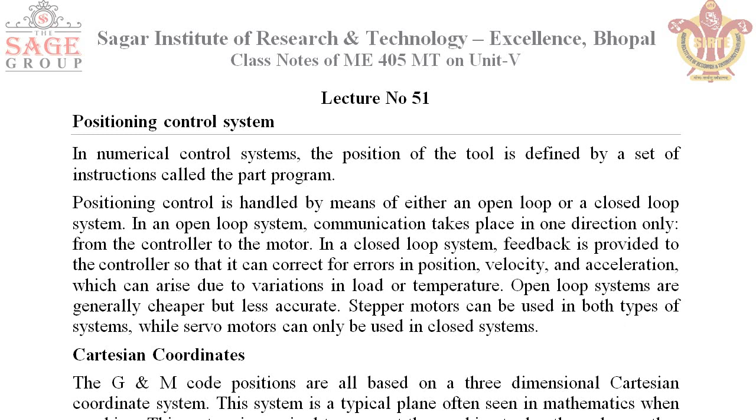Now the next thing is Cartesian coordinates.

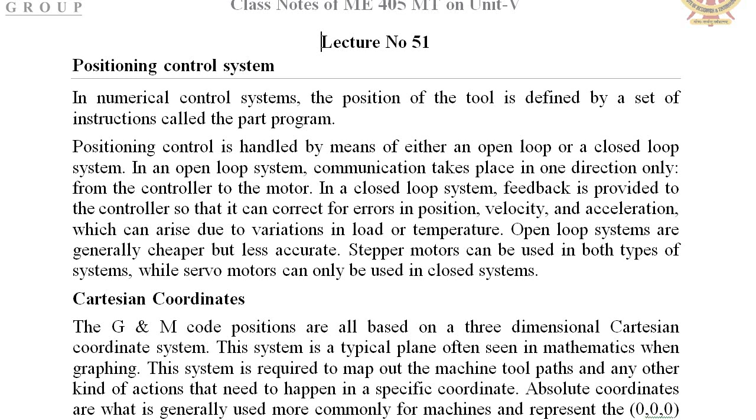The G and M codes positions are all based on the 3-dimension Cartesian coordinate system.

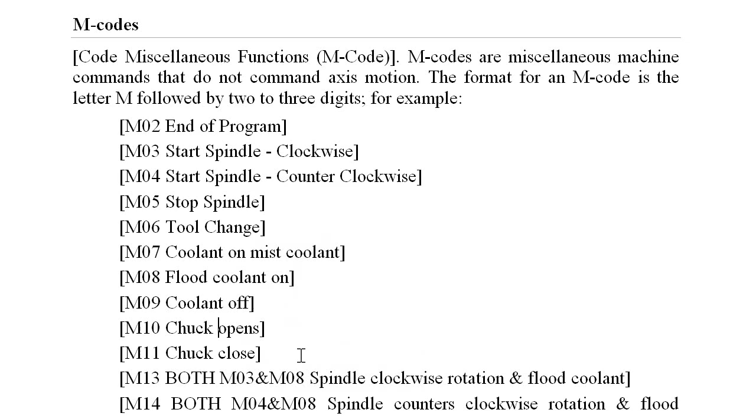M11 chuck close, M13 both M03 and M08, spindle clockwise rotation and flood coolant, M14 both M04 and M08, spindle counterclockwise rotation and flood coolant.

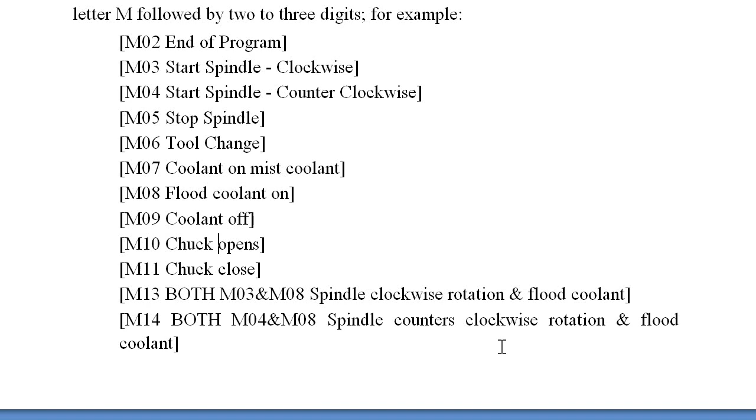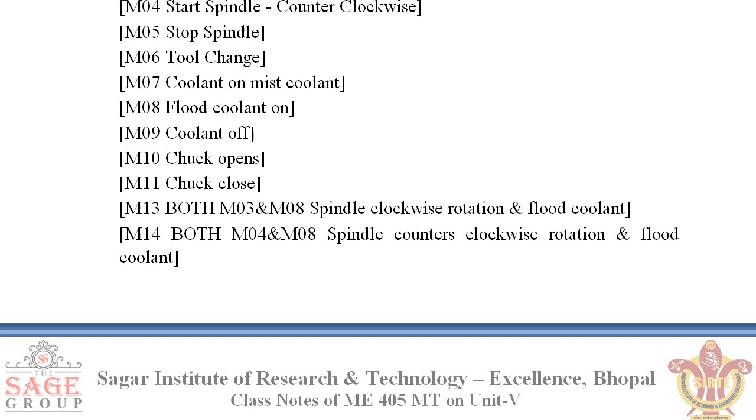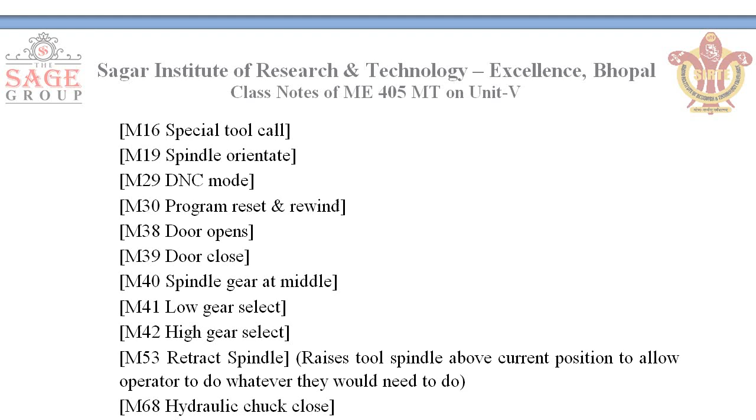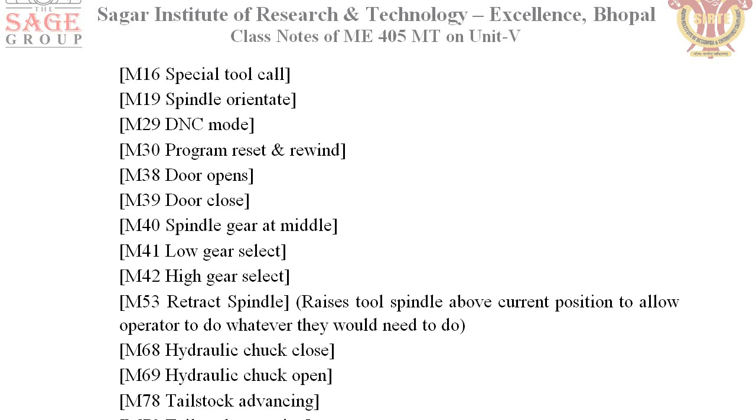Then this is M16. M16 special tool call, M19 spindle orientation, M29 DNC mode, M30 program reset and rewind, M38 door open, M39 door close, M40 spindle gear at middle, M41 low gear select, M42 high gear select, M53 retract spindle.

M68 hydraulic chuck close, M69 hydraulic chuck open, M78 tailstock advancing, M79 tailstock reversing. So these are the examples of M codes. So I hope you understand.

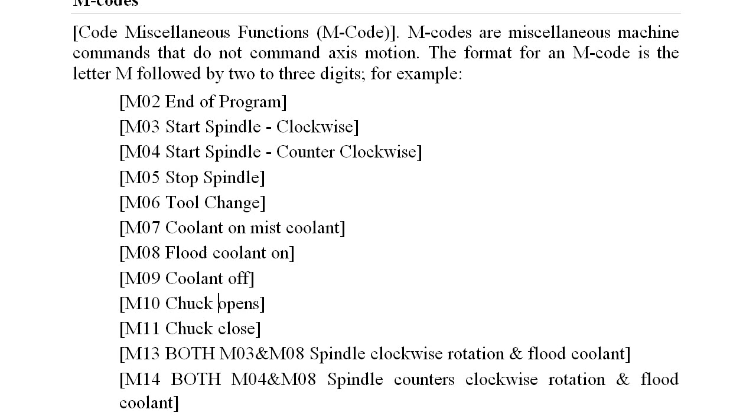Tomorrow we will discuss the G codes. So in today's lecture we have understood the positioning control system, the Cartesian coordinate system, and what are the M codes. I hope you understand the lecture.